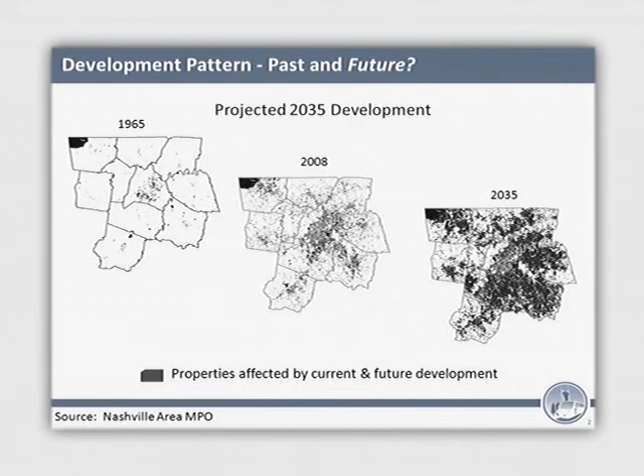So one of the things we've been looking at is what to do with the folks coming to this region. This chart shows growth in population in the Nashville region from 1965 to 2035, the MPO is estimating we're going to add close to 1 million additional residents to the area. Population in 1965 was 750,000; in 2035, they're projecting 2.6 million. The reason this is important is that in 2008, our region had 1.7 million people living here.

Now that's on par with Austin and Charlotte. And in terms of transit and transportation choices beyond just the automobile, they are miles ahead of us. As we compete nationally with cities trying to grow and bring in corporate relocations, these other cities are our competitors. In 2008, Seattle and Denver were already above the 2.6 million range. So in about 20 plus years, we'll be very similar in size to Denver and Seattle as they are today.

So how are those million people going to get around? Well, let me ask this question for folks who haven't already seen this: is this Photoshop or is this real?

That's real for people that have to come in from other counties and distant suburbs, and not for people that travel from the city corridor. Yeah, that's right, this is a regional corridor we're showing here. That's right, this is real. It's the Katy Freeway in Houston, Texas. It's the widest highway in the world, 26 lanes at some points, actually gets to 28 at a few if you include some of the side lanes.

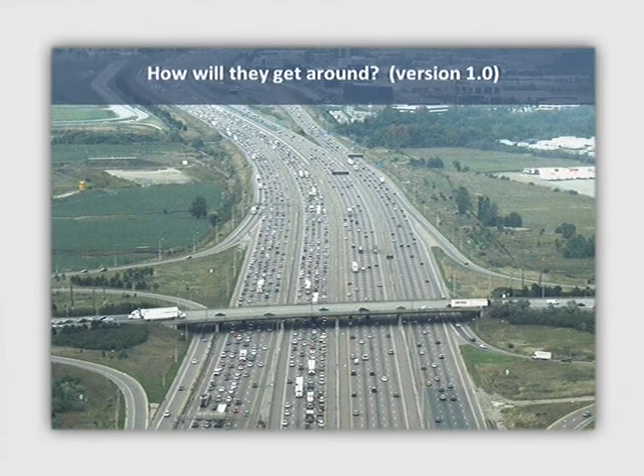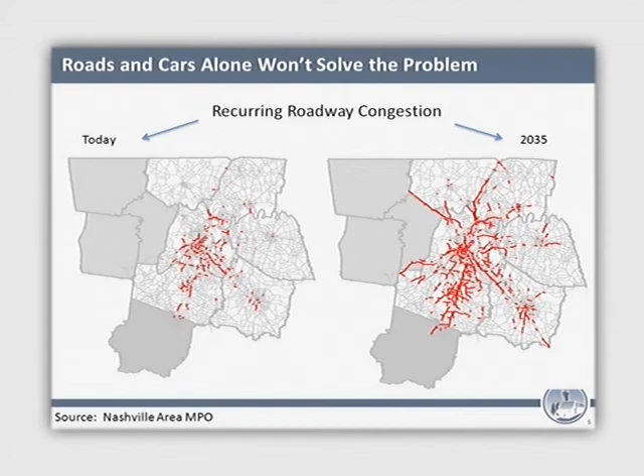Now, another aspect of growth in our region is congestion that occurs on a daily basis, not due to accidents or anything of that nature. Today, the roads highlighted in red on the left map are congested based on just capacity issues, there's too many cars to fit on the roadway. The MPO has projected that in 2035 it's going to look like the map on the right, and that's after the MPO has built all of the projects they have proposed in the 2035 plan. If you're aware, that's a list of many, many, many roadway and highway projects. So the reality is we can't build our way out of congestion.

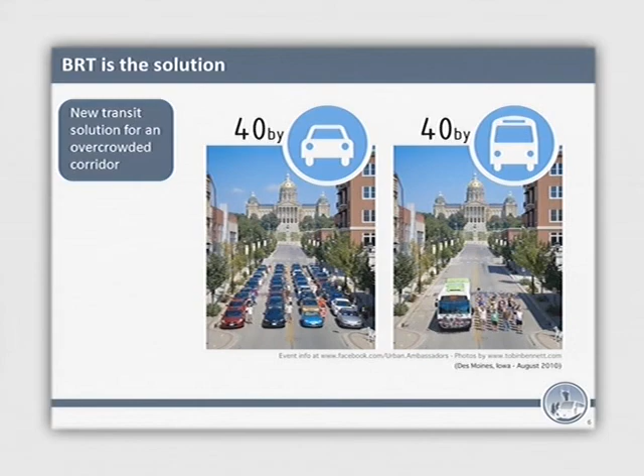So what I offer is a solution that looks at taking 40 cars out of the road and putting them into a smaller footprint. This graphic shows you on the left how much space 40 cars takes up, and on the right, how much space 40 people take up in a bus. As you can see, it's much more efficient to move 40 people in a bus than it would be in single occupant vehicles.

So now here's where we get to how will they get around, version 2.0. This is what's called Bus Rapid Transit, a system in Cleveland, and it is a fantastic system, which we'll have some more photos talking about. It's spurred economic development. It's basically a subway on wheels.

Stepping back now to talk briefly about our project and the earlier phases, just to bring you up to speed. If you participated in the first phase of the project, which was roughly a year long, from January to January ending this last December or so, we determined what's the best mode for this corridor.

Would it be buses? Would it be BRT? Would it be streetcar? Where we ended up was determining BRT is the best mode.

Some key elements of this corridor: really this is our main street for the region. We have 170,000 jobs on this corridor, 25,000 residents, and 11 million visitors annually to Nashville who all travel to destinations along this corridor. We have Vanderbilt Stadium, the downtown arena, the Ryman. Pretty much everything that we have in Nashville is on this main street. We've got LP Field on the East Nashville side.

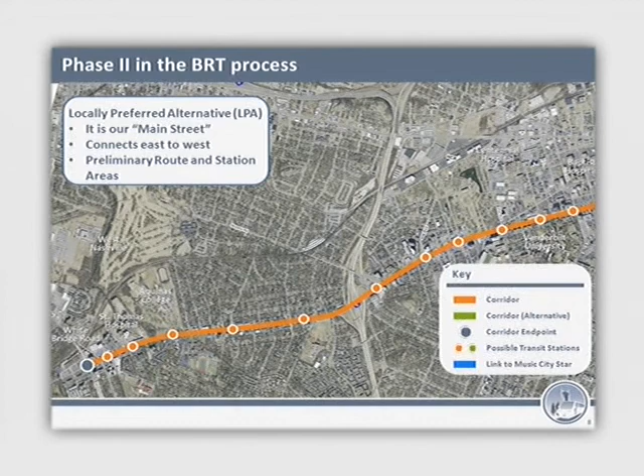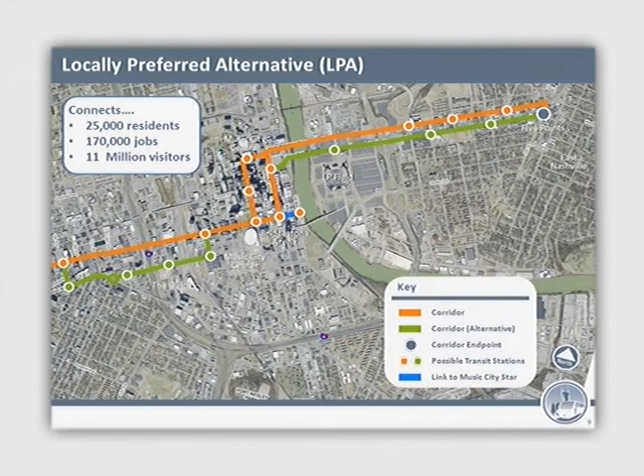In this first phase, we determined the preliminary routing and stations, which effectively went out to White Bridge Road and then came in on Broadway and West End. When you get into town, we hadn't yet determined in that first phase which roadways we should be recommending. On this map shown in green were some of the alternate routes we were looking at, including a leg that potentially would divert onto Demonbreun, and we were still looking at how best to get across the river to serve the East Nashville folks.

What I would say today, and we'll talk about this in the sessions, is that working with the URS team, we are now making a recommendation on exactly the routing we're proposing to you all for your comments. Another thing we were looking at in the first phase was determining the mode, and we compared light rail, bus rapid transit, and streetcar.

I would also argue that the future of transit across the country is going to be bus rapid transit, not streetcar. The reason is the bang for the buck you get from a transportation perspective comes from dedicated lanes. If you dedicate a lane to a bus or a streetcar, it doesn't make a difference—it's going to make it faster. As bus technology improves and we move towards electric buses, I think all the advantages of streetcar will basically go away.

That being said, the cost of the project was estimated at roughly 136 to 150 million, and that's kind of where we're refining those numbers as we go through this second phase.

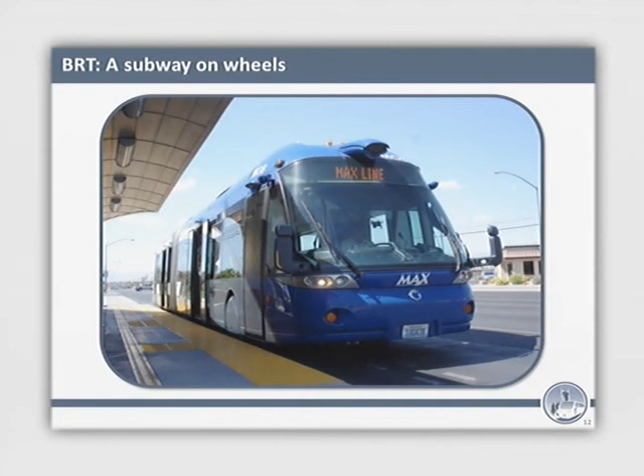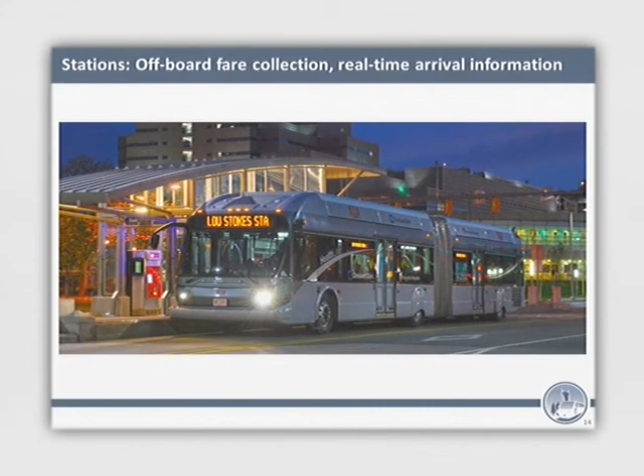This is in Las Vegas. These are really dramatic, exciting vehicles with wide doors and all the amenities you might find on a rail type system. I do want to show you an example of what bus rapid transit could look like on West End, and this is just an example.

It's not a proposal at this point, but it shows median running buses, and it shows buses on the sides of the roads as well. When you get to the breakout sessions, we'll discuss more about where those might be located.

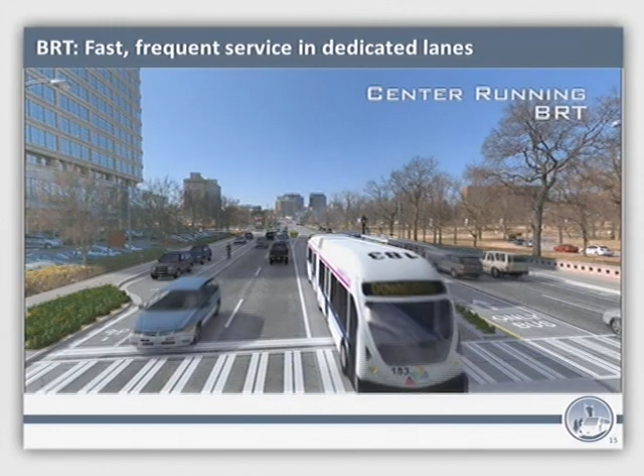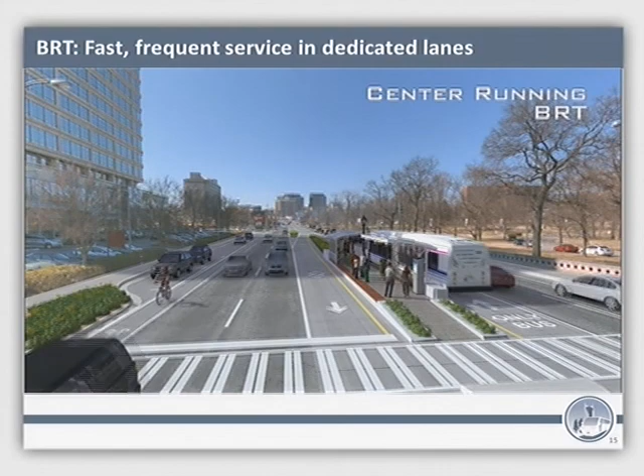So what's running right now is an example of the bus running in a median way, and that's what we're proposing for a majority of the project. Then some portions where the bus could run in dedicated lanes on the sides of the roads as well.

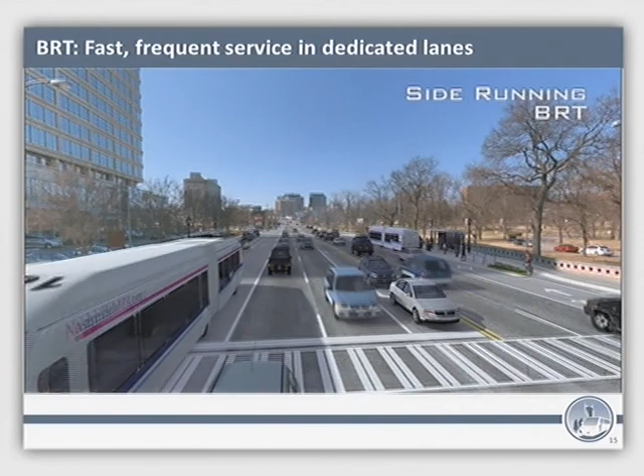Okay, so now we get to the good stuff where you really get to kind of get into the nitty-gritty, get into the breakout sessions and learn more about the project. We have three stations, as Ed mentioned, and I'll go through each of those real quickly.

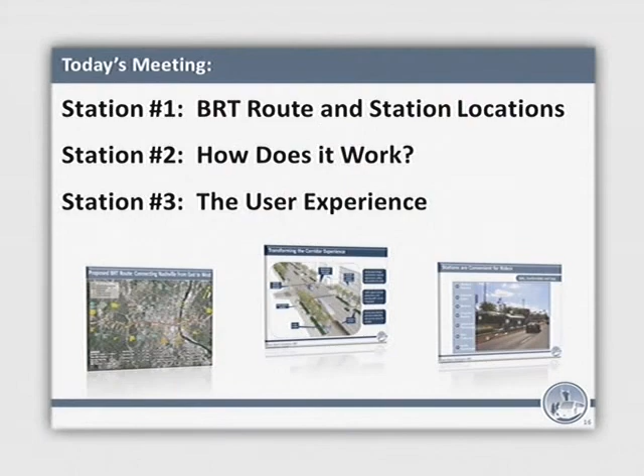We're going to talk about station number one, which will be in this room. We'll be talking about where is the routing, what's kind of the logic behind the routing, how are the stations going to operate, and how will the buses or the rapid transit vehicles get through downtown.

At station number 2, which is in the next room, we'll be talking about the system and how it actually works. Doug Tennant from URS will be going over that.

We're looking at making this project something that has a positive impact on the corridor. In fact, it'll have a great economic benefit for the corridor with fast and frequent service and improvements to the streetscaping, so the sidewalks and trees.

The third station will be talking about the user experience. What would it be like for you to ride this system, and what could you expect to see? We're talking about station design, how that's going to look. These aren't just bus stops on the side of the road—these are iconic stations.

This is our third meeting, as Ed mentioned, and we'll have another one tomorrow. Then in August, after we've gathered all your feedback, we'll be coming back to the public for another round of community meetings, probably towards the end of August, to take your feedback, fold it into the proposal, and let you know what we believe would be the best project.

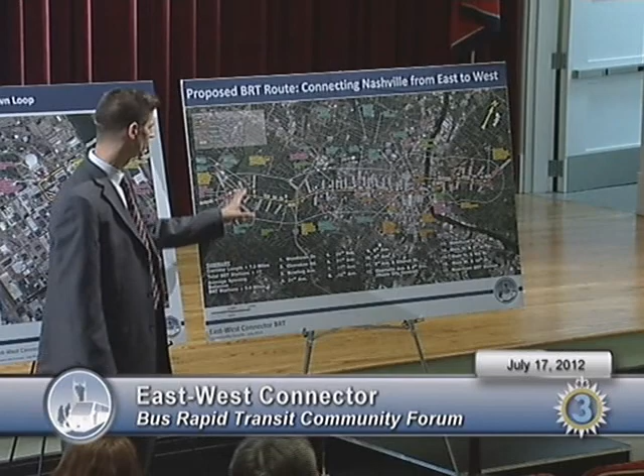The corridor and what we're proposing in terms of the actual routing of this service would start out basically at White Bridge Road, or really the first station would be at Woodlawn. We're looking to establish a park and ride lot where folks from the community, as well as a little bit further out, could drive in, park their cars, and hop on this dedicated route system.

The second station we're proposing would be at Cherokee Road, which would provide an access point to Sylvan Park as well as the Richland West End community and neighborhood.

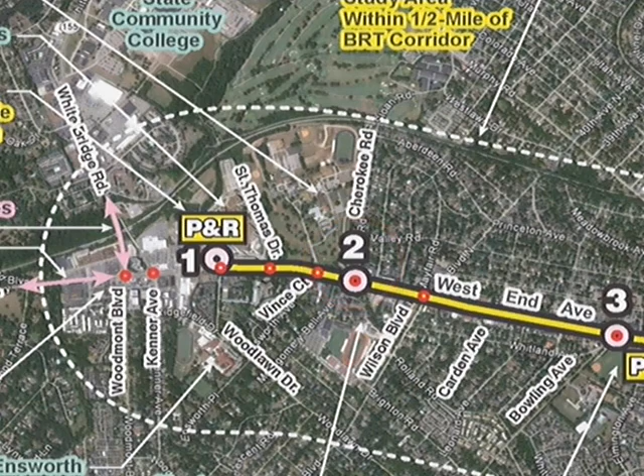The third station we're looking at is at Bowling, and we have been talking about a potential park and ride at Elmington Park as well. There has been some concern over what impact that would have on the park, and obviously we'll be looking at that as we go through this process.

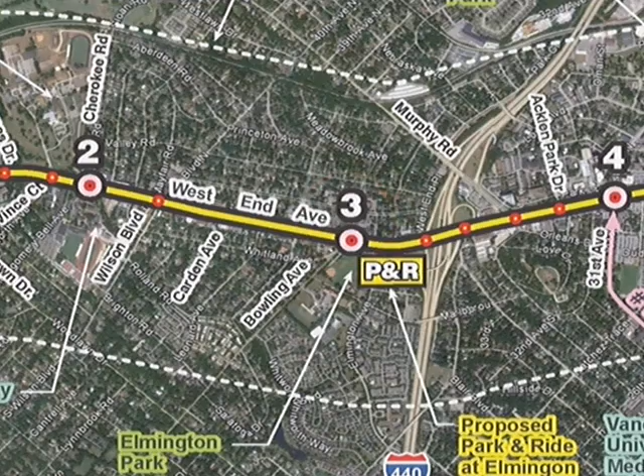The fourth station will be at 31st. As we've been moving through this project, there were more stations proposed in some of the initial maps that we had. But looking at all of the traffic that travels to the interstate here, over from Vanderbilt, we realized that trying to squeeze dedicated lanes and a bus rapid transit vehicle in there, or two stations, would be difficult. So at this time we're only proposing one station right there at 31st.

The great thing about this station, however, is that when the bridge gets completed that goes over the railroad tracks to Charlotte, the 28th Street connector, MTA is going to be providing some connecting crosstown service. We know at MTA that there's a strong need for crosstown service, so this will be an opportunity for folks to ride the system and transfer to get across town, or come in, transfer to this, and go downtown too. We're real excited about that.

The next station we're looking at is at 26th, which we consider to be on the western side of the Vanderbilt campus. It's also where Centennial Park is and all the regional events happen. So you could take the bus to the Arts Festival, the TACA events, or games at the Vanderbilt Stadium.

On the other side of the campus, basically at 21st, is where we're proposing another station as well. On the east side of the campus, we feel this would be the access point for a lot of the hotel workers or folks at Vanderbilt getting to the hospital areas. As someone pointed out at one of our previous sessions, this really is key to the Baptist Hospital area as well. So that station will be able to feed all of the businesses and all of the jobs that are in that area.

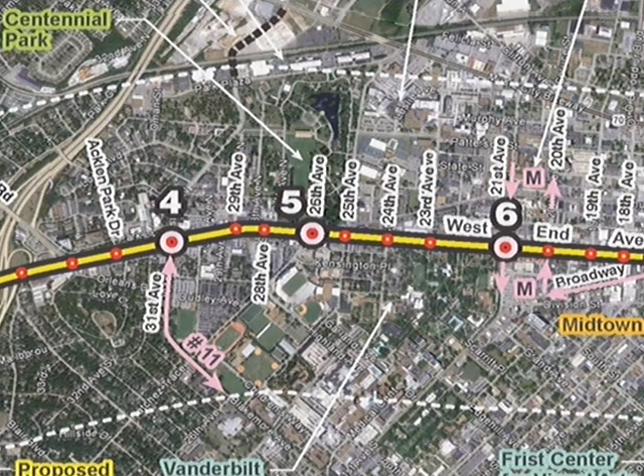That's really the walking distance folks will go. A quarter mile is a guarantee—you'll get someone to walk a quarter mile easily. A half mile is kind of what we experience here in Nashville because we're so spread out.

That being said, we go down to station number 7, 17th Avenue, which is really the heart of Midtown. We expect a lot of opportunity for redevelopment in that area, and a lot of those opportunities may not exactly be on West End but will have impacts on Church and parallel streets as well.

Coming further into the city, station number 8 is proposed at 12th Avenue, which is kind of our Gulch access point. One reason we're not recommending going down Demonbreun is that while it gets you a little closer to the Gulch as configured today, the Gulch is growing with development happening all along there, so this may be the center in the future.

In addition, you'd potentially have a time delay to passengers. If you're getting on at 31st trying to get downtown, now we're adding time to that trip by doing that little jog. And the reality is the folks in the Gulch now are kind of Gen Y and real urban—an extra block isn't going to be a deal breaker for them.

Moving across the interstate and the train, basically the next stop would be at 8th Avenue, and we've had some comments from folks at other sessions that they think we should be looking at 9th or somewhere else in there. So we'll be looking at that, but that's what we're proposing right now.

The next station would be at 10th. At 5th, that's station number 10, and that's kind of the entryway to downtown Broadway. That's where the hill ends and it gets flat, and that's really sort of the downtown area.

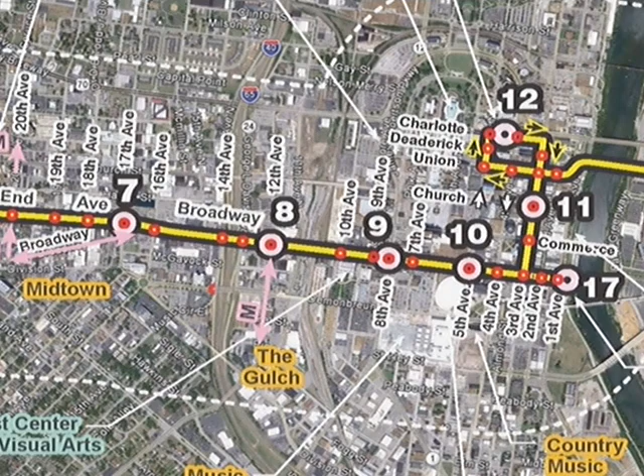From there, we propose the busway go to 3rd, where it would make a left and go up 3rd—I'll switch over to this map to show you how it would go through downtown. We're proposing two dedicated transit lanes throughout the corridor, and I'll talk about that at the station designs. On 3rd Avenue, they'd switch over to the sidewalk side, basically.

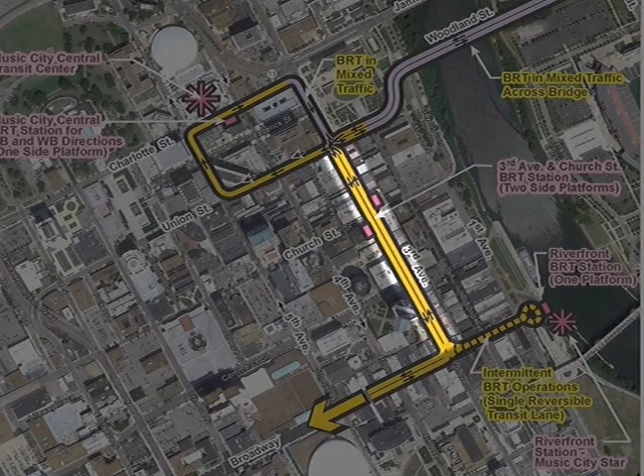So we'd have a station at Church on either side of the sidewalk, and this would be converted really to a bus-primary street. Some of our MTA regular service buses would be taken off of 4th and 5th, which we use now to access our Music City Central transfer facility, and put in here as well. Then the center lane would be used for automobile traffic to access all the parking facilities that are out there now.

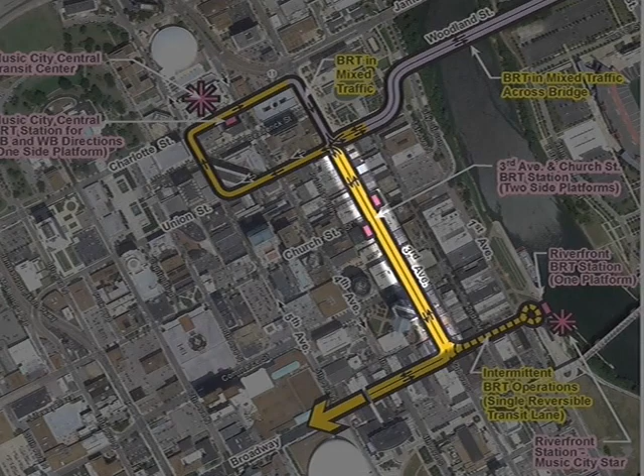And there are a lot of parking garages and surface lot parking, so that would have to be a one-way street, obviously. We're looking at this point at proposing the street go northbound. From there, the bus would turn into one single lane on Union, make a left onto Union, then a right onto 5th and a right onto Charlotte. The yellow lines are where we're talking about having dedicated lanes. Then it would go into mixed traffic.

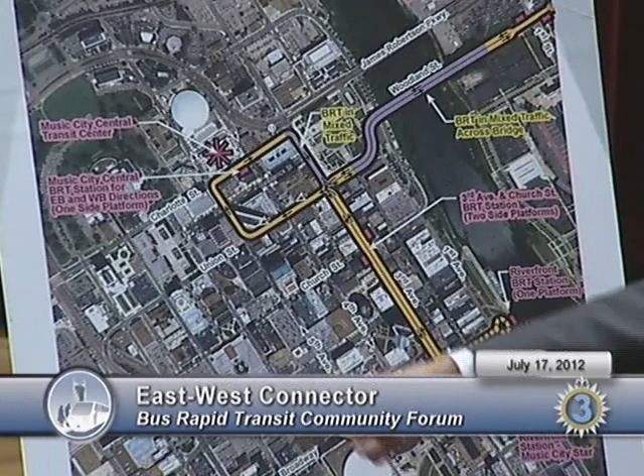From Charlotte, we'd have a station across from Music City Central. We would not be pulling into our transfer facility—we'd build a station right there on the street where folks could come in from the region. So if you're riding a Gallatin bus, Hendersonville bus, or Clarksville bus, you could come in, get off here, and just cross the street to get to the 170,000 jobs on that corridor. It would go in mixed traffic, basically get in the left lane. The gray on the map is where it's mixed traffic. From there, we could potentially put in what's called a queue jump.

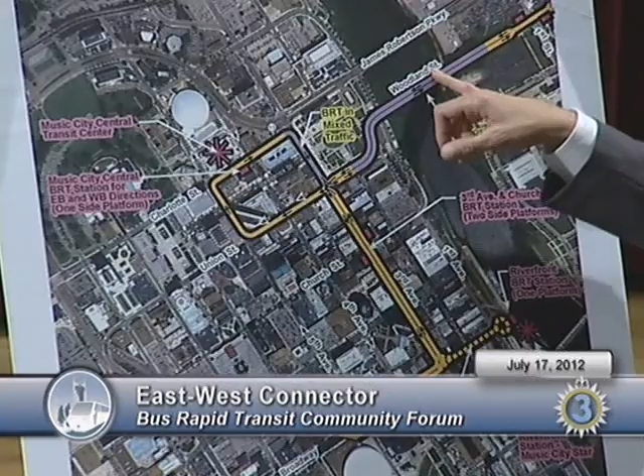So if the bus got stopped at the light here at Union, it would turn green for the bus maybe 8 seconds before it does for the traffic. That would allow the bus to get a head start on the bridge. And since there's no turning movements off of the bridge, it's pretty much a straight shot, and the bus will be able to get across there very quickly.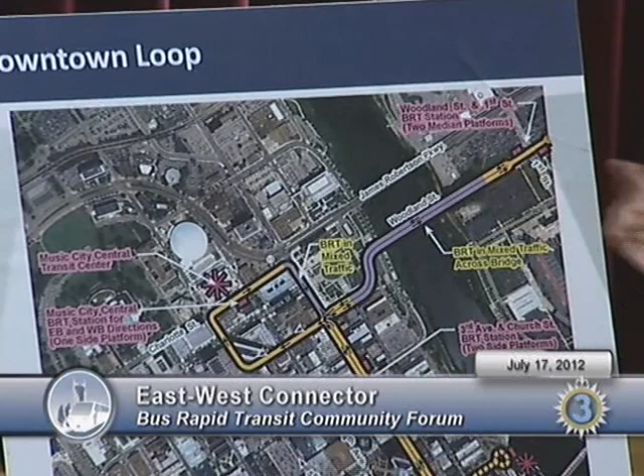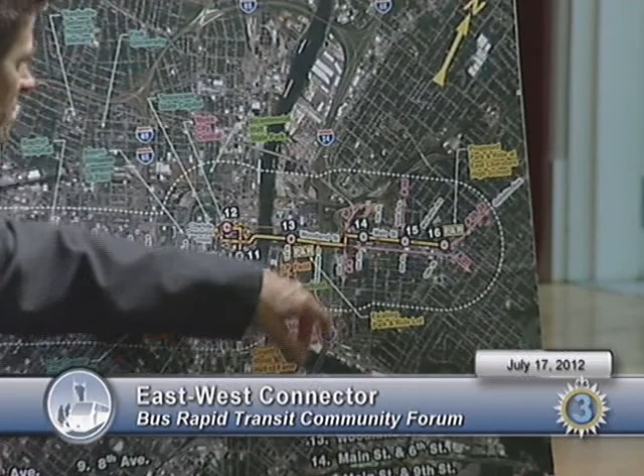Once it gets to the other side, it would then re-enter into bus-only lanes. We'd look to have a station at LP Field, or really the Juvenile Justice Center, and could serve all of the events there. It would head down to 5th Avenue or 5th Street, make a left and then a very quick right onto Main, at which point we'd have 3 stations proposed, kind of at 6th, roughly 8th or 9th, and then again at 10th.

We are proposing a park and ride at East High, and have been talking with Metro Schools about doing that. So the end of the line, the bus may actually come off of Main, pull into a park and ride lot to make its turnaround, and then that's where it would come back out and come back in.

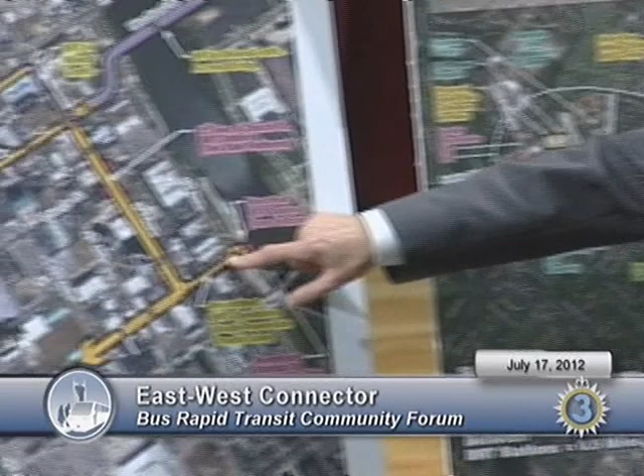One thing I forgot to mention was a station also at Riverfront. So potentially we could have one single lane that would basically go down to where the Court of Flags sort of used to be, where that little circle is. This would do a couple things. For big events, July fireworks, anything like that, we could have a number of buses queued up and ready to go to just get people out of there. The other thing is for the train riders coming in on the Music City Star train, they could basically hop off the train and do a short walk and get on this, and then get to those 170,000 jobs that are out on that corridor.

Right now, we already have a bus that meets those passengers, and it's full as it heads out. So that's basically the routing.

Let me talk a little bit about how the stations will be designed, and then we'll have time for your comments and questions. We are looking for a majority of the corridor to have stations that are in the middle of the roadway, as one single station.

The way this would operate is you'd have one bus lane in each direction, and the buses would have to have doors on both sides. So when we talk about these being rail-like vehicles, it would be just like a subway vehicle that you get on, and the doors are on both sides. That's necessary to provide the boarding when you have a platform in the middle of the road.

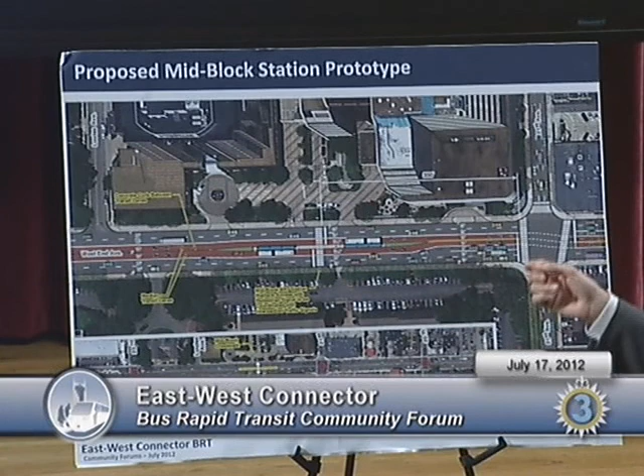With this design, there are a lot of advantages in that we are able to get 2 lanes through the intersections, and that helps us keep the bus service flowing and on time, and doesn't have as much of an impact on traffic. I'll talk about the alternative to that in just a second.

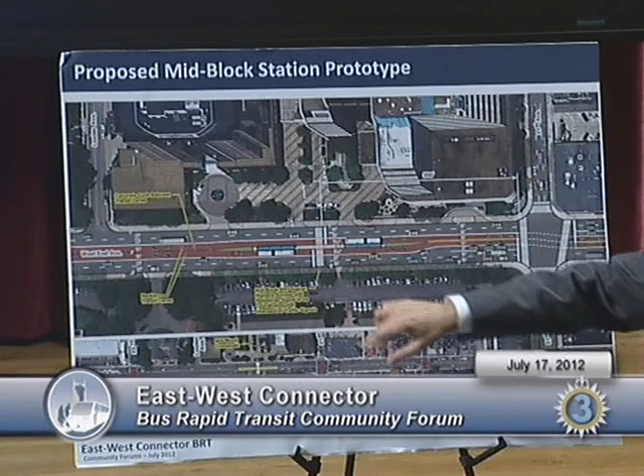But the flip side is that we would be adding stoplights at all of these stations for pedestrians to get across. So we'd have a new stoplight here just for the pedestrians. Now, the reason this doesn't break the traffic flow is because this signal would be tied with this signal. So when this one goes red, this one would go red, and it would allow passengers to get back and forth. I would tell you that we had some serious consternation when our consultant team said, well, we want to add a bunch of signals to get the pedestrians across. But we do need to have those signals to do that safely.

Moving over to a split station design, as I may have mentioned in the earlier presentation, we did challenge our team to stay within the right-of-way, so we don't want to be purchasing a lot of property as a result of this project. So with that being said, in some cases where the right-of-way is fairly narrow, they came up with a really rail-like solution. The 2 lanes could narrow down to 1 at some station areas where there's a tight constraint, and the bus would basically operate like a rail signal.

So if a bus were coming from the west towards downtown, this is the 21st area, it would stop at a stop bar.

This bus would come through the intersection, load and unload, go on, and then this bus would be cleared to go through and load and unload on the opposite side. Ten minutes? Okay, great, thank you.

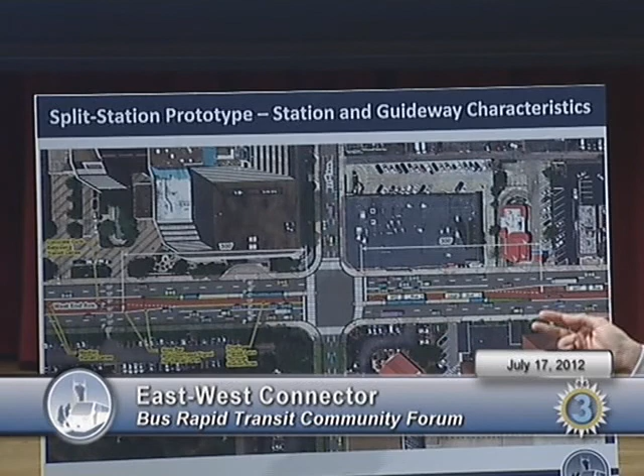That's a really unique design, and it can work, and we'll probably end up having to use a few of these throughout the corridor. But the issue is this can have an impact on the service we provide through the bus system or BRT system by having those buses meet. So whenever a bus has to stop and wait for another bus to clear and load and unload, that could potentially cause some delay.

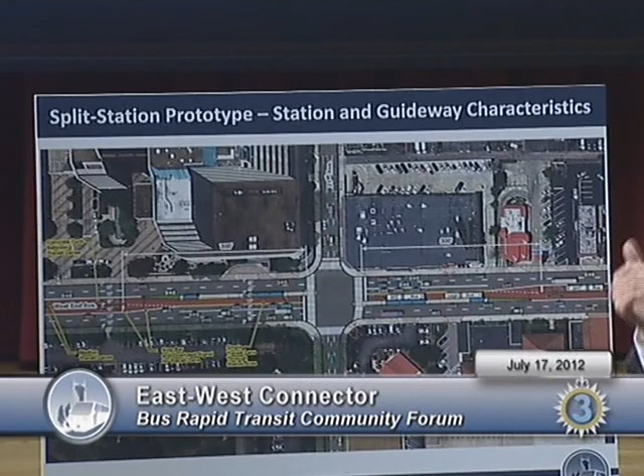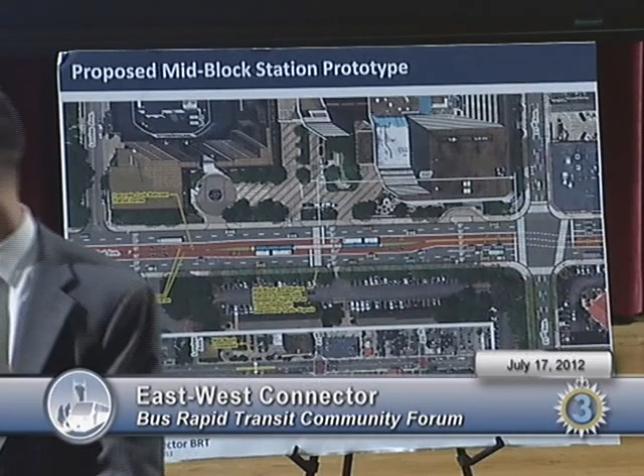And as we add more buses into the system as ridership grows, you're going to have more of those potential meets. That's why we pushed hard for the consultant team to find as many places as they could to fit in these dual lanes that run through the intersection, which requires buying a different type of bus with doors on both sides. So that's a real quick, high-level overview of the proposed routing and stations and how some of that will work.

I will mention that in order to keep these lanes free of automobiles, they will have some kind of demarcation showing this is a bus-only lane. In addition, down the center of the roadway, there will be some type of barrier to prevent automobiles from making left turns across that lane, because if a car pulled in there and stopped waiting for traffic to go the other way, that would really mess up the system. And for it to be a BRT on rubber tires, that can't happen.

So to address that, and you'll learn more about this from the other session, they've talked about allowing legal U-turns. So if you were trying to turn into the Lowe's on Vanderbilt or somewhere across here, you would just go down to the light and have a time to make that U-turn and get around, and then it's a right turn in.

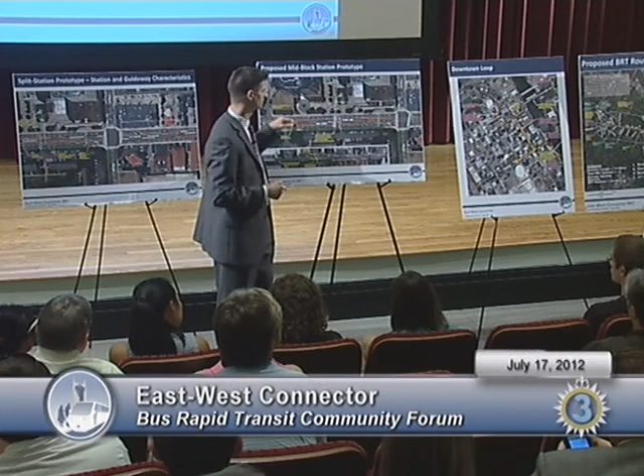Actually, as we've been reviewing this and looking at cities across the country and internationally, that's something a lot of cities don't even allow — left turns on their major arteries — because it really has the chance to mess up the movement of traffic through there.

If the funding doesn't go through, is there any idea how far back that would push the project if we don't get the funding? Well, it would push it very, very, very far back. The question was, if we don't get the federal funding, what's going to happen? My sense is we'll then try again to get the federal funding. So we're going to do everything we can to make that project as competitive as possible.

Are you telling me that this is all going to be federally funded and no local money involved in this? No, not at all. The Small Starts program, to be competitive, basically they'll pay for up to 50% of the capital cost for the project, at a maximum of $75 million. So if you had a $150 million project, they would potentially pay up to $75 million.

Now some cities, as they do these projects across the country — Chicago is looking at planning lots of BRTs, New York already has one — they'll actually overmatch, as it's called, so the locals might kick in 60%. We'll be looking for a 50% match from the federal government.

My concern is primarily with Lower Broadway downtown. Right now, our pedestrian traffic is pretty much at capacity. With the opening of the new convention center, that pedestrian traffic is going to increase. Right now, the policy is to shut down streets for events at Bridgestone Arena or elsewhere for over 10,000 people. How do you plan to navigate that with the bus rapid transit line when those big events are going on and those streets are shut down? And how do we plan to accommodate increased pedestrian traffic downtown with its growth?

Thanks for coming to our station here. I'm Bob Murphy with RPM Transportation Consultants. We are the traffic engineers for the project, and I'm going to turn it over to Doug Tennant, who is with URS, the main consultant on the project.

Thanks, Bob. Again, my name's Doug Tennant. I'm a senior planner with URS Corporation here in Nashville. We're the lead consultant, and I'm the project manager for the proposed East-West Connector. I appreciate you all coming out this morning, early afternoon. What our session is about—you all came from Station 1, right? So generally it starts out at White Bridge Road and the system runs over to East Nashville.

What we want to talk to you about is how that actually works. How does this system work along West End, Broadway, and Main Street? Where do the BRT lanes go? What about traffic? What I would preface the whole discussion with is this idea, this concept, that transit and traffic and vehicles—there's a balance that we're trying to achieve there.

Right now out on Broadway and West End, traffic and vehicles are way up here on that scale, and transit and pedestrians are down here. What this project seeks to do, because growth is coming, is start trying to pull that balance back into line, so that vehicles still work on West End. We do not want to break West End. This project is not about making traffic on West End become gridlock. What we want to do is introduce a new mode of transportation along West End to pull that into balance so that West End, Broadway, Main Street can grow into the future.

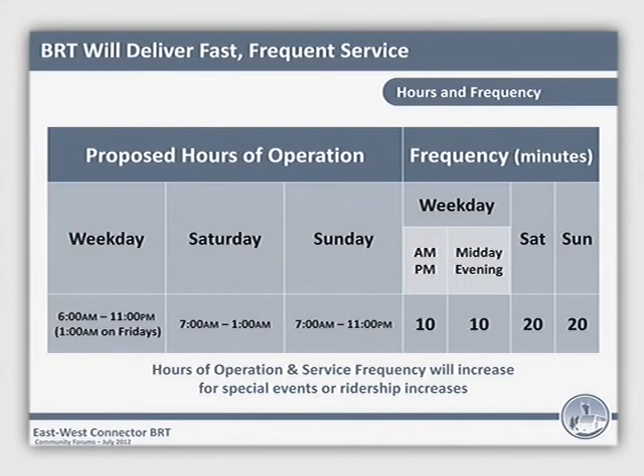So fast, frequent service. The way it becomes fast is the ability to add 2 dedicated BRT lanes, where those lanes are only for transit vehicles. They would be 2 lanes, 1 inbound, 1 outbound. But that balance starts to get a little tight. To make sure that balance stays in place, we are having 2 through lanes inbound on West End and 2 through lanes outbound on West End.

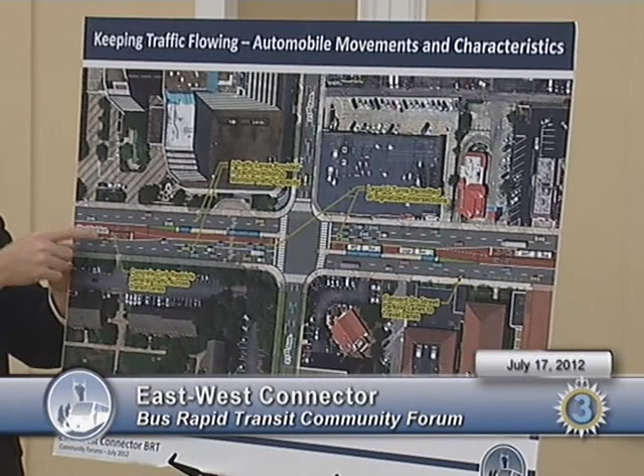And because of this, the transit way, we don't want cars to get into it. What we're going to do is restrict movements across that transit way. We don't want people turning left across it and blocking it, because a bus that isn't on time is an empty bus, and it has to be on time. So what we're doing is making these through lanes to move traffic up and down the way.

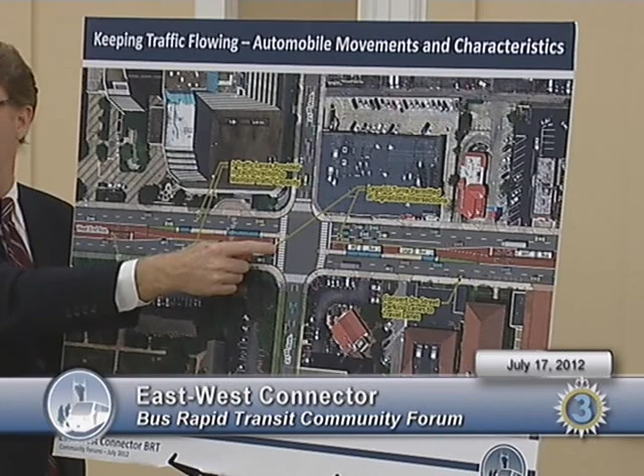Because we're going to restrict those left turn movements, we're going to add a longer left turn storage length at all the traffic lights. So if you wanted to go from here to, say, Vanderbilt Plaza, you'd get in this left lane and we'd have a new legal U-turn signal to pull into that lane. There'll be a signal at 21st Avenue that, because it's one way, wouldn't say turn left, it'd tell you to do a U-turn, with a green U-turn signal allowing you to do that in a protected fashion.

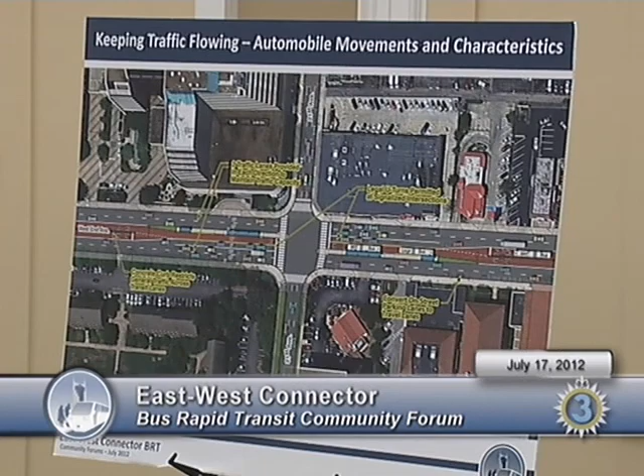Bob, you might take it from there. Yeah, and at every signalized intersection, you will be able to make a left turn or a U-turn. We're doing traffic analysis to identify how much left turn storage we need to accommodate the left turns and U-turns, and also what that does in terms of signal timing—what's the amount of green time required to do that.

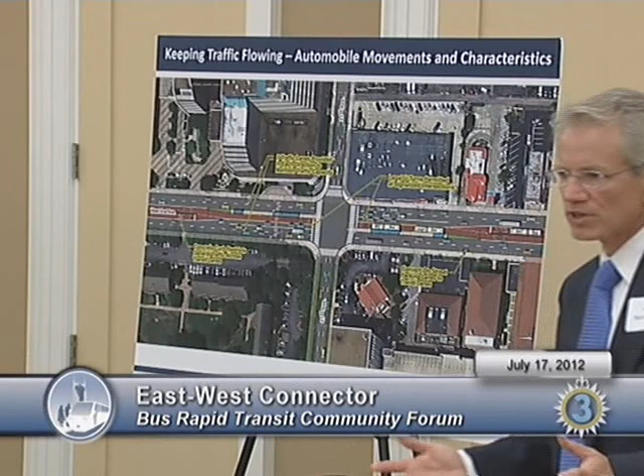Now, one point I'd make as far as maintaining the two through lanes is that it will require the removal of on-street parking on West End so we can maintain those two through lanes. I think you may have seen a concept with stations that were mid-block. This concept is another option that shows the stations at the intersections. We'll probably go with, if we can, more concepts with mid-block stations, because that enables us to maintain these two BRT lanes through the intersections.

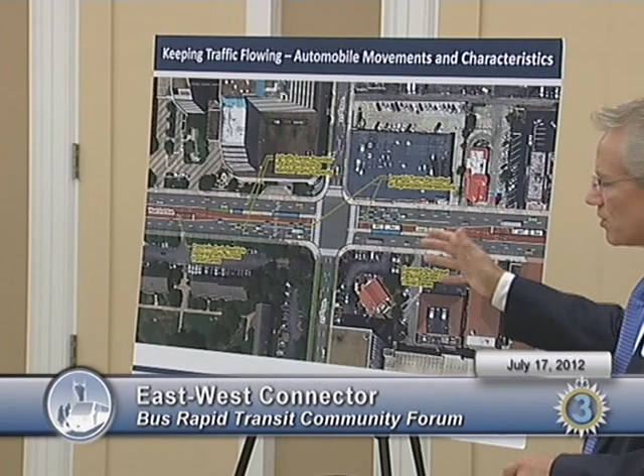But regardless of whether the station is at the intersection or mid-block, for pedestrian crossings there'll be pedestrian signals as well as crosswalks, so pedestrians can get to the median safely.

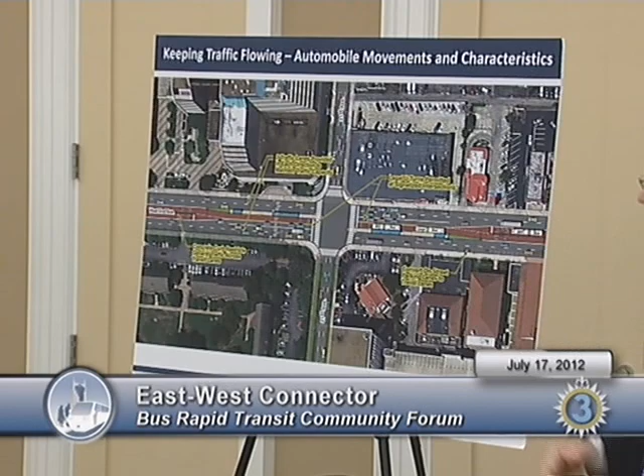Let me add a couple more things, and then we'll open it up to questions. I think Bob talked about pedestrian movements. To the city's credit, they also want to take transit, land use, streetscaping, and pedestrian movements and plan them together because they all work together. Land use can be intensified and new development patterns can occur because of transit, but transit occurs because people feel comfortable walking to those stations.

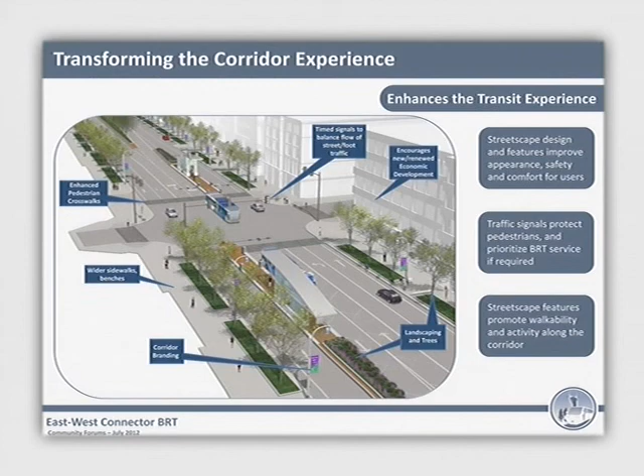So in this proposal, the city and MTA are talking about a streetscaping program that transforms West End and Broadway and allows that pedestrian walkable environment to be enhanced greatly. Because again, if Bob and I want to take transit, but we have to take our lives into our hands trying to get to it along West End, guess what—we're going to do it once and then we're not going to do it again.

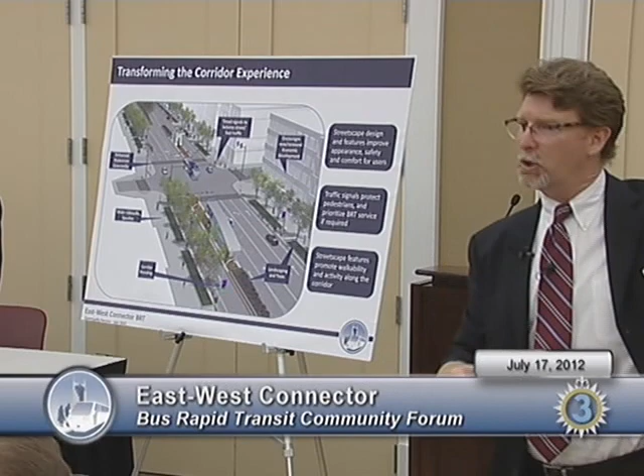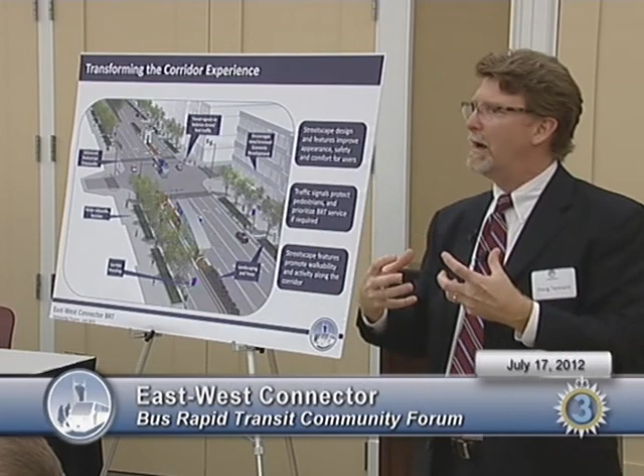A significant effort will be taken to transform the corridor to make it more walkable and pedestrian friendly, even to the degree that, like West End or Broadway, side streets that go to big anchor employers like Vanderbilt or HCA—we may improve those streetscapes, what I call finger streets, so we can pull riders out of those areas into the system.

Finally, I think fast frequent service really comes down to: is it going to be more convenient for me? Is it going to work for me? And what's the benefit to me?

The easiest way to describe that—if Bob and I are out at St. Thomas Hospital, the end of the line on West End, and Bob says let's go to lunch over in East Nashville. I say okay Bob, but I have a meeting afterward so I need to take my car. If Bob gets on the BRT as proposed and I get in my car and we start at the same time, Bob will get to East Nashville 25% faster than I will. Because that vehicle has a dedicated lane, and has the ability to prioritize the signal and make it through.

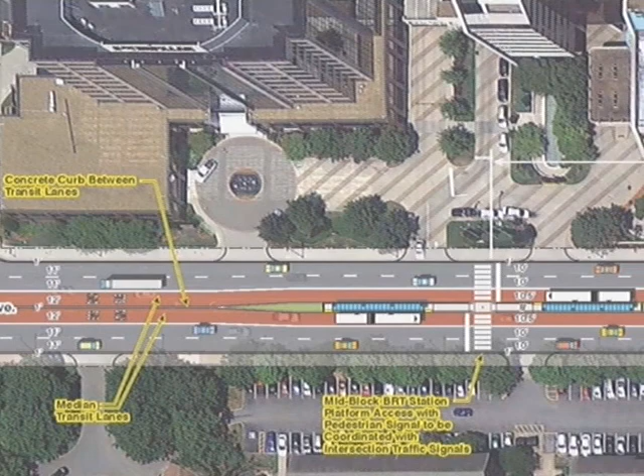Now that doesn't mean the vehicle can be a mile away and keep the signal green—we're not going to break West End, we're not going to let traffic suffer at the expense of transit. But there are a variety of methods that let Bob's BRT vehicle progress through the corridor while me and my car are sitting there watching Bob zoom on by.

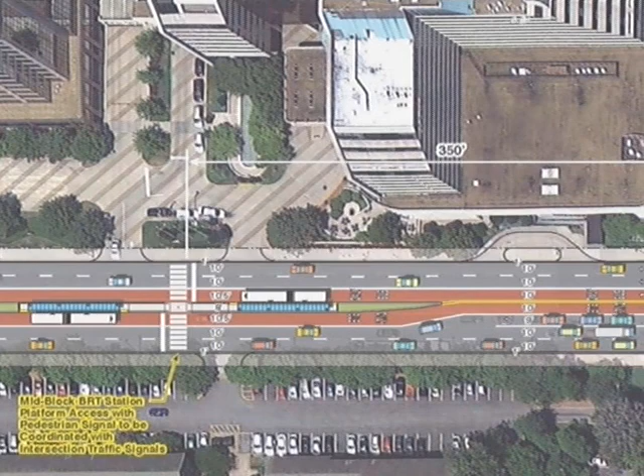That's where the proof in the pudding is—is it convenient, is it fast, is it something that allows me more freedom to do different things in this corridor? So with that, let me open it up to questions or comments.

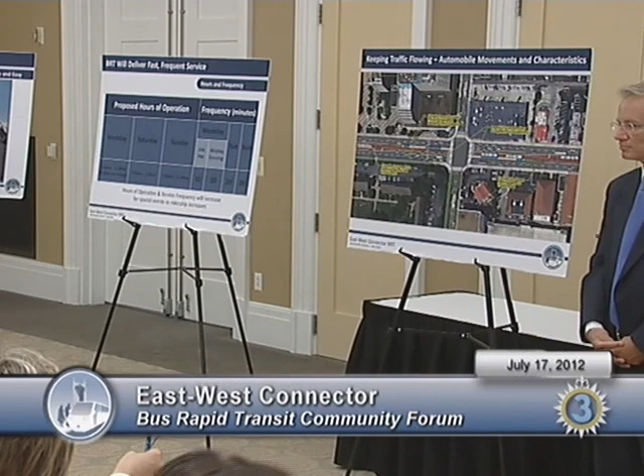I'm interested in feeder lines—how the buses can feed in and make the transit to Midtown, Baptist Hospital, or Vanderbilt. You mentioned park and ride in some fairly congested areas already, like the Belle Meade area. What thoughts do you have about feeder lines into the BRT?

That's a good question about feeder bus routes. We are planning and designing this system, but we suggested to MTA that you can't just view this in its own little shell. So we're looking at all those feeder routes and starting to look at all of MTA's routes to figure out how they'd work with this.

I don't have all the answers today, but I can tell you we're addressing that issue—how to get feeder routes to this system, how to connect back to major generators, and how to allow people to walk to the system. Good question, don't have the full answer, but we're looking into it. MTA has been looking at it too.

For instance, they have a route they're going to implement when the 28th and 31st connectors project is complete. They call it the University Connector, which will connect the north side of Charlotte down to Vanderbilt and Belmont and those areas, crossing this BRT line at West End and 31st.

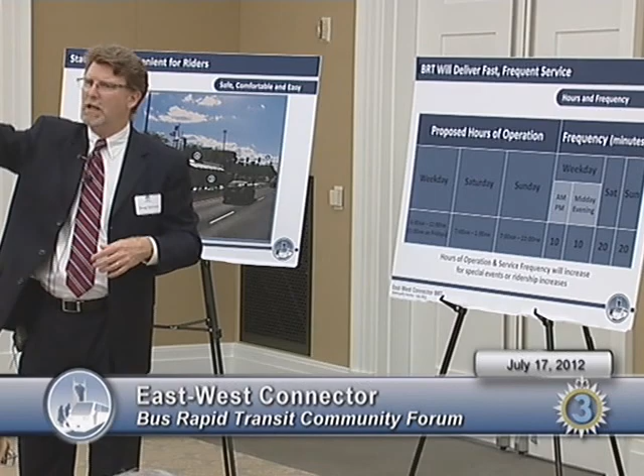I think for guys my age it's something that's kind of changing, but my wife's a professor in college, and she has a bunch of students that are going to live in Nashville. They don't want to own a car, they don't want to pay insurance, they don't want to pay a car note. They want to live in the Gulch and be able to use transit to get where they want to go. They want to live out at 31st and West End and go downtown and do it with mass transit.

This is a game changer for Nashville because I believe the younger generations, the Gen X, the Gen Ys, and the millennials don't want those costs. They want the freedom to get where they want to get along this corridor, because this corridor will have everything they want to live, work, and play. So that's really what we're trying to do.

Isn't it true that aging boomers are going to want that too, and do want that? Yes, that's something I think is very important. He's one of those, he knows. I'm getting around that age too. You're right, we really want to be able to, particularly as we age, not rely on a car. We might get to the point where we can't drive a car but still want to be able to get around. So it's very important that we have options. And even if we do have a car, we may not feel like driving all the time, or maybe we have more difficulty driving at night. So it'd be nice to have that as an option.

That's a great point. It's not just for the young people, but great transit goes across all demographics, all socioeconomic levels in our experience. Yes, sir.

Is there any way to integrate bike lanes while we're changing this corridor so greatly, or is it wiser just to create bike lanes on other corridors? Has there been any analysis on that?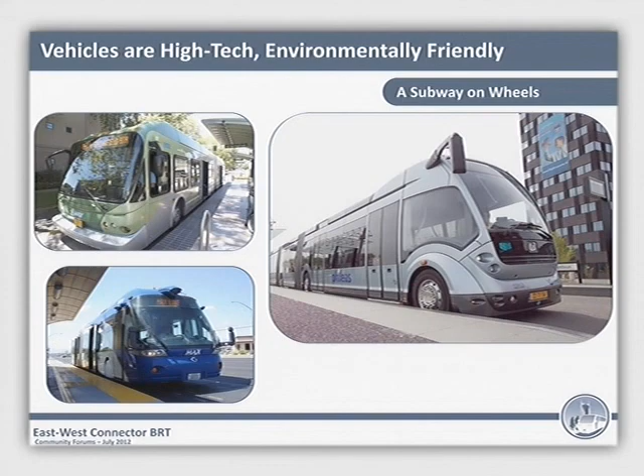The vehicles themselves, as you've heard multiple times, are rubber-tired subway, light rail, trolley-type vehicles. Rubber-tired meaning they operate in dedicated lanes on pavement as opposed to operating on tracks. But from that point on, the similarity to a bus begins to disappear. One of the most important features is they're designed with wide opening doors at level entrances off of platforms at permanent stations, so the doors open and people get off and people come on.

Some of us in Eugene had a chance to ride on the EmX system, this one right here, and we found it could stop, unload, load, and be out in less than a minute. That's why the system becomes very efficient and attractive, because of the frequency allowed by not spending a lot of time waiting in the station with other vehicles backing up.

Propulsion, the current state of the art is probably where we are right now, which is diesel-electric hybrids. Cleaner, quieter than current diesel technology. We're probably very close to the next generation of all-electric transit vehicles because of the fast recharge capability at an individual station, but we're not there yet. Keep electric in mind, but certainly the hybrid is extremely important.

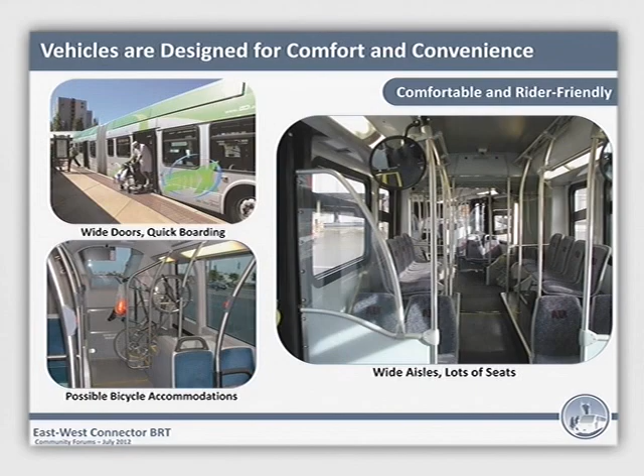On board, part of that off and on boarding is an area for big things - bikes, luggage, walkers, wheelchairs if you don't need the wheelchair while you're seated in a seat on the coach itself.

MTA has done a terrific job making bikes possible on our MTA system by mounting them on racks in front. But if you stop and think about it, number one, you're going to be in a dedicated guideway - do you want to step around in front of this bus trying to hang a bike on it? Number two, that takes time. So Portland and cities with far more bikes per passenger than we do have found this solution. If you've ever been where they do this, you'll see it's very efficient - you just roll your bike up, hook it over a rack and go, and get off the same way.

That is also true with large parcels, with baby strollers - just the kinds of things that are almost impossible to move off and on a bus where you're having to navigate steps and you've got people behind you saying, move on, move on, move on.

Interior, just think state of the art. We had a great question just asked - Jeff Yarborough, if you know, is on the MTA board - first time we've heard the question: will you be able to open the windows on a nice day, as opposed to always being captive in an enclosed, air-conditioned, heated environment? The comment was from somebody familiar with the St. Charles streetcar in New Orleans, and part of that experience is - there are days down there when you don't want the windows open. But anyway, we're going to look at it.

The experience inside will be the best that I think you could imagine on any vehicle of a rail or non-rail type. And clearly MTA is looking at wireless and those kinds of things so that experience will be there.

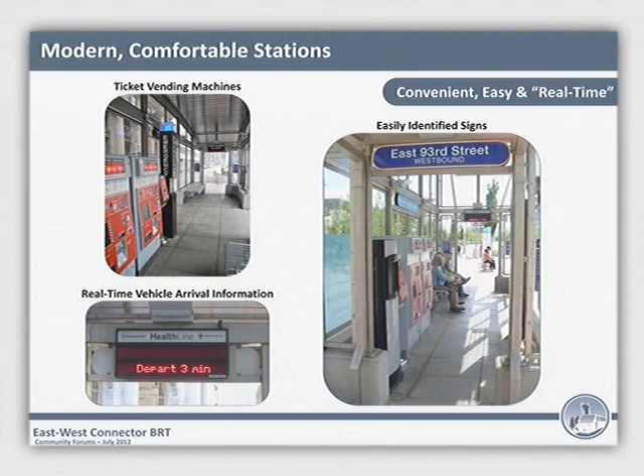I'm going to move really quickly to the station - we'll talk about the guidance systems. The stations: permanent, iconic. You've heard those terms. Iconic means really two things. Number one, they're a reflection of the character of the neighborhood in which they're located and of Nashville. They're not just a bench with a telephone pole and a blue sign and a trash can. These are stations that are there permanently, and they're attractive.

They are very easy - you come out of Bridgestone after a concert, you're not from Nashville, and somebody says catch the station, go down to the station and catch whatever we end up naming this vehicle. And if you go out three stops and get off, there's a cool restaurant. You don't want to have to stop and say, now where is that station? Tell me exactly what. You need to walk out, there it is. And when you get off, gee, this is kind of cool - go to your restaurant, come back. If you've had a couple glasses of wine, who cares? You're not driving. You certainly want to be able to find the station.

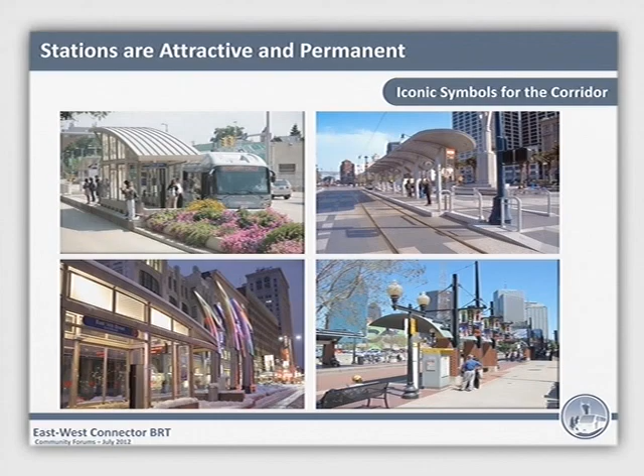The public art - it's a tremendous opportunity for public art to be a part of the design. Seab Tuck is with Tuck Hinton Architecture, they're on the team doing the work on the project. Keep in mind, you don't have to have an architect on a transit system team - if you think, well, yes you do - my point was, Seab already said yes you do, because this is an architectural thing as well as a transportation thing.

The final point on the station, the second point beyond the iconic as a design feature, is they're permanent.

Businesses, whether you're building apartments or condos, or you want to attract more customers and you're willing to invest, find these systems to be very important, knowing they'll be there forever, because that means there will always be a station. Think of your favorite transit station in New York, Los Angeles, Chicago, or Miami, and what goes on around it - transit-oriented development. It's attractive because I can have people coming in my front door, residents renting my apartments or buying my condos, who aren't car dependent. I'll provide some parking, but I've got a whole other market now because of this permanent station. So the stations, iconic and permanent, are extremely important.